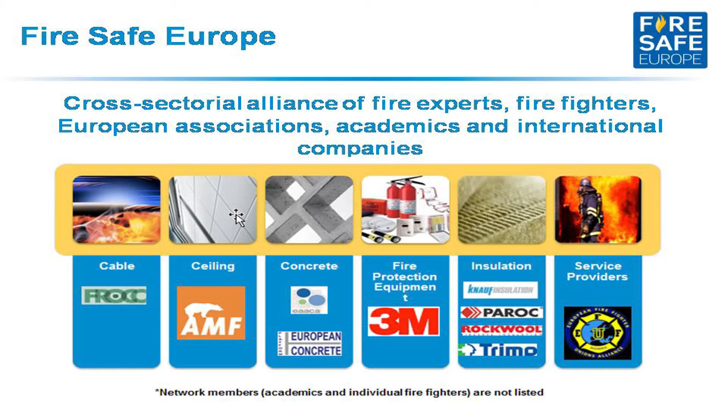The other thing I would say about Fire Safe Europe is that we are very focused, as the name suggests, on fire safety in Europe. Our objective is to explain to the European Union and the regulators in the European Union how we should tackle fire safety, but I hope that some of the lessons that we've learned in the European Union can be useful here in Dubai and more widely in the United Arab Emirates to understand how we should tackle fire safety.

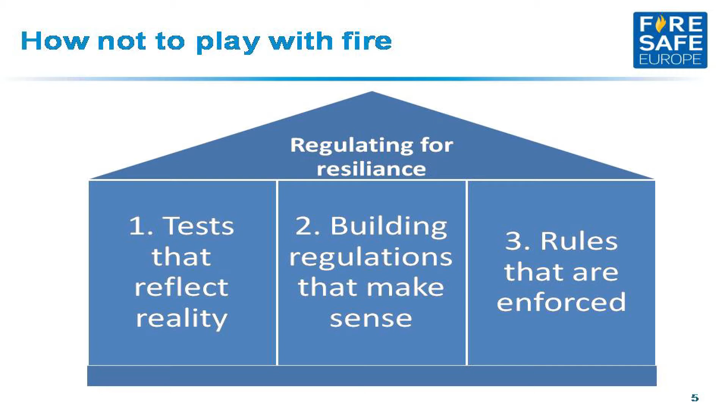Our previous speakers talked more about how we tackle building fires and how we deal with fires when we get to the fire. I'm going to talk a little bit more about the regulatory structures and the ways that we need to work to make sure that fires are not large and are safer when they get there. Some of the firefighters that we work with have been saying that in the past they came and found fires in buildings. But today they're often coming and finding buildings on fire. The whole building itself is on fire.

And as our previous speaker said, the challenge for firefighters to deal with huge fires on facades and buildings is a very different challenge than they were facing in the past. I think we have to look at some of the challenges we're now facing and ask ourselves, how do we regulate for that and how do we structure ourselves? So why are we here today?

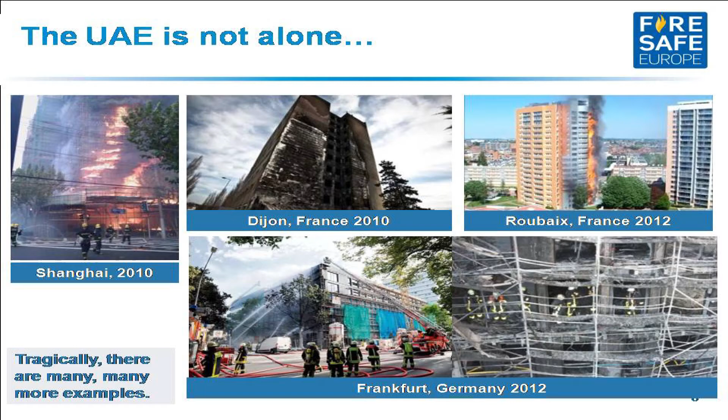Well, I think you're very aware of the fires that have happened in the UAE and some of these huge facade fires. But this isn't just a challenge here in this part of the world. It really is a global challenge. These are some of the major fires that we've seen across the world and across Europe, and some of these fires have killed over 50 people. These are really extensive fires, and they're causing major problems, not only for firefighters to fight them, but the environmental pollution that comes off them, and of course the cost, and more importantly, the cost of life.

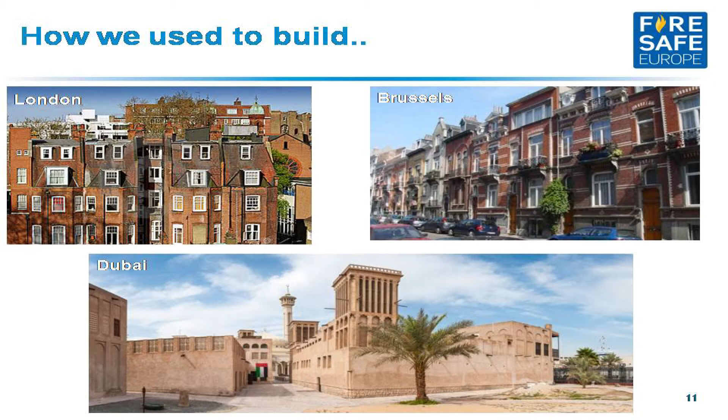So we have a common challenge across the globe, to ask ourselves, how are we going to change? Because buildings have really changed dramatically over the last 30 years. If we look at how we built buildings before, and our first speaker looked at how the UK and traditional building stock looks, two key issues I see when I look at these pictures are, one, those buildings were quite small. So we weren't dealing with huge high-rise buildings in the past.

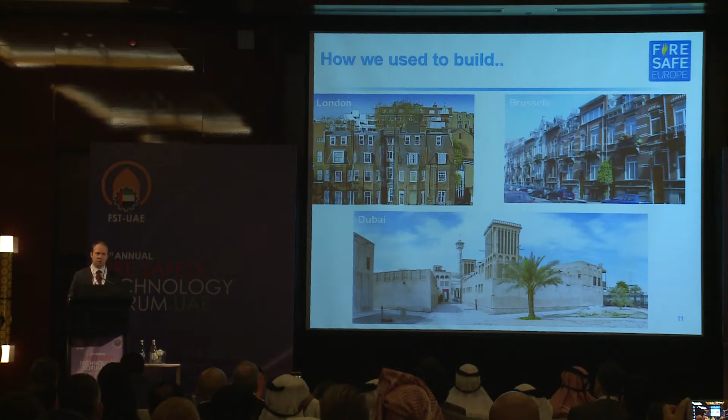And the other thing was they didn't have a lot of combustibles on them. They were often made from brick or concrete or stone. Therefore, when fires did occur, the building itself wasn't necessarily supporting those fires to grow and become more difficult. But that's not what we're seeing today. Not only here in Dubai and other parts of the Emirates, but across the world, we're seeing more and more high-rise buildings, more and more difficulty in managing them, and we're having to think quite clearly about how we manage them and what we do to make that possible.

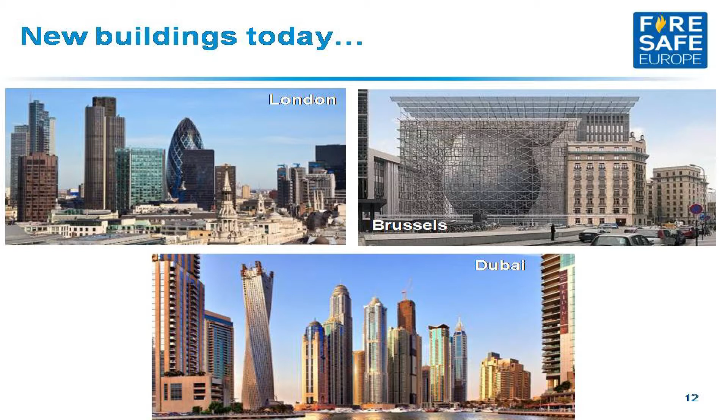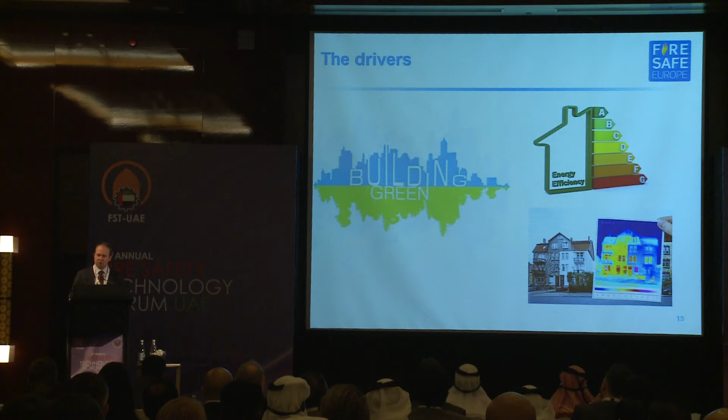And we have new drivers in the built environment. We have a huge drive for improving the energy efficiency of buildings, and for really good reasons. We know that we've recently agreed in Paris the new version of the Kyoto Protocol on climate change, and there's a lot of pressure now to reduce the amount of energy used in buildings.

And the impact of that, particularly in Europe, has been a lot of new retrofitting of buildings, adding layers of insulation on the outside, making those buildings more energy efficient. Now, as a company that produces insulation, of course, we're very supportive of that. But when we do that, we have to make sure that we don't change the way that building deals with fire, because we don't want to make it worse.

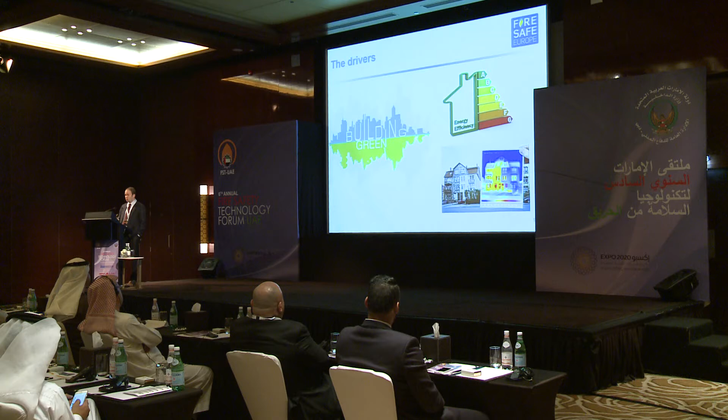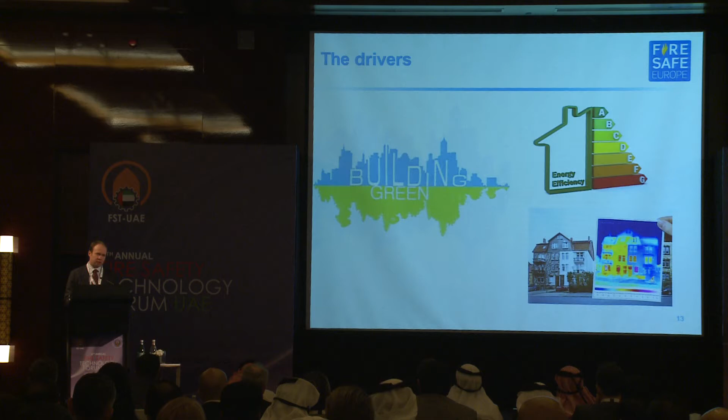Again, we're seeing more and more fires, and maybe some of the questions we have to ask ourselves is how do we ensure those buildings are now retrofitted and built correctly to manage those changes? And of course, particularly in this region, this region's been really taking the lead and taking a very strong position on sustainability. And I hope you'll be also taking a very strong position and leading on fire safety as well.

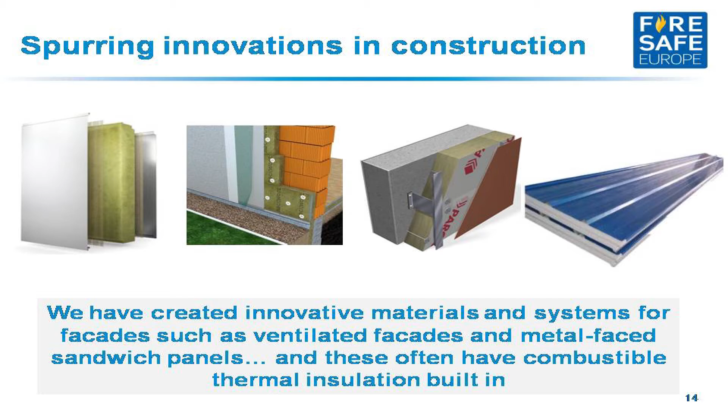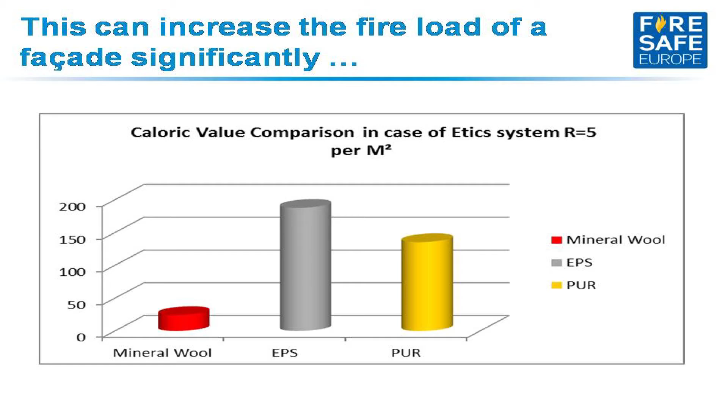All this has been really spurring innovation. So we're seeing completely new systems, we're seeing completely new approaches to the built environment, whether it's metal-clad facading, whether it's sandwich panels on buildings. We see a huge change in the way that we're building our structures, the way that the external wall systems are done, and we're having to think about how we adapt to that. And some of the things that we're seeing is that we have to take into account that those different systems can have very different approaches to fire.

This is just a quick view of the amount of calorific value in different insulation materials that we see on the facade. And I think one of the things that we notice is that the more that that facade has significant amounts of calorific value, the more likely that the fire and the insulation in that system will actually make it more likely that the fire will spread aggressively through the building.

And of course, innovation is great. But one of the problems that we face with innovation, and not just in the fire space, but always in innovation, is that innovation tends to go very quickly. But those of us who are focused on regulation and the regulatory structures, we're always playing catch up. We're always finding ourselves slightly behind the innovations because, as I say, innovations go very quickly.

Regulations, whether it's here, whether it's in Europe, whether it's in Australia, whether it's in North America, always have to catch up. And that's just something we have to take into account and accept the fact that we're going to have to constantly be thinking in this space as we adapt and we change our building systems and we go to new innovations. How do we have to adapt our fire regulations to make sure that when firefighters and others turn up at buildings, those fires are as safe as possible?

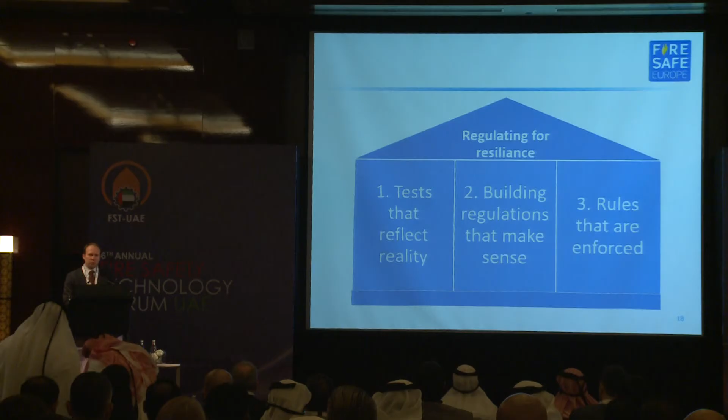So when we look at fire safety in buildings at Fire Safe Europe, we look at the three pillars which we believe are critical in terms of making sure the regulatory environment and the structures are in place. One is we need to make sure that tests reflect reality. One of the things we've seen in the past is often the testing systems for high-rise buildings, but also for insulation and external facades, have not always reflected the reality.

We have to make sure that the building regulations make sense. How we regulate a single-family home of 2 stories has to be, by nature, very different from how we regulate a 25-story building that has multiple occupants and multiple different ways of being used. So we have to look at that.

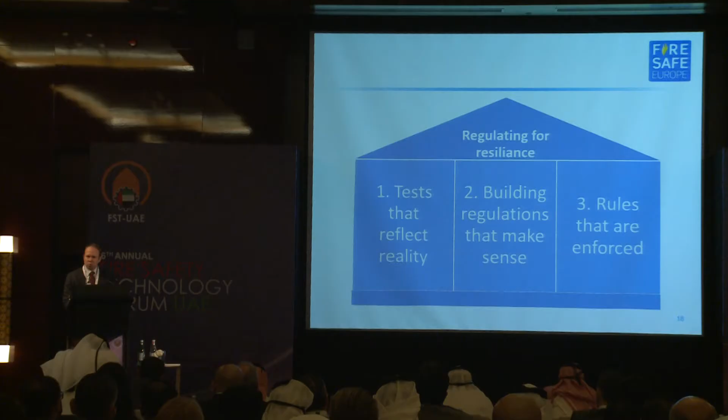And of course, the question of enforcement. The construction industry faces an enforcement issue all the time. We know enforcement is difficult, but it's very, very important in this particular space that if we're going to have systems that pass, and we're going to have regulations that fit, we should make those regulations as simple and easy as possible so that enforcement is also as easy as possible. So looking at the tests that reflect reality.

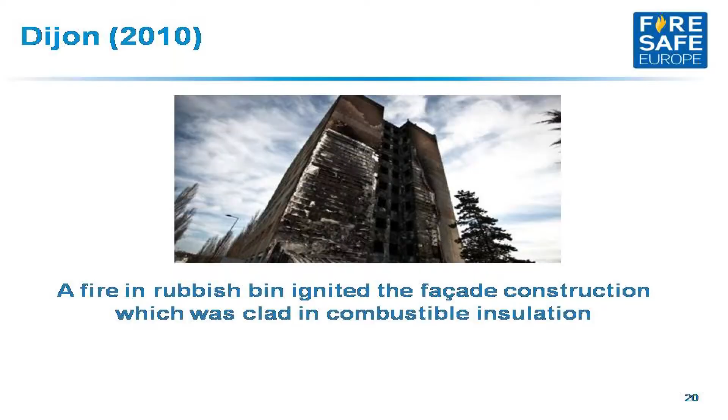In Dijon, France, we had a fire which was started by a rubbish bin which caused a major facade fire. This is quite important because many of the fire regulations and the standard testing methods for fires in Europe were based on fires coming out of the flats, fires that were coming through windows and out onto the facade. But a lot of the big fires that we've seen, particularly in Europe recently, were fires on the outside of the building, which had caused the entire facade insulation system to catch fire and go.

And the Dijon case led to the French system being changed. So now, for example, the French have learned from that lesson, and they've now developed a new system where the fire from the outside is also part of the testing regime. And large-scale testing is very important because we say we need to make sure that the tests reflect reality.

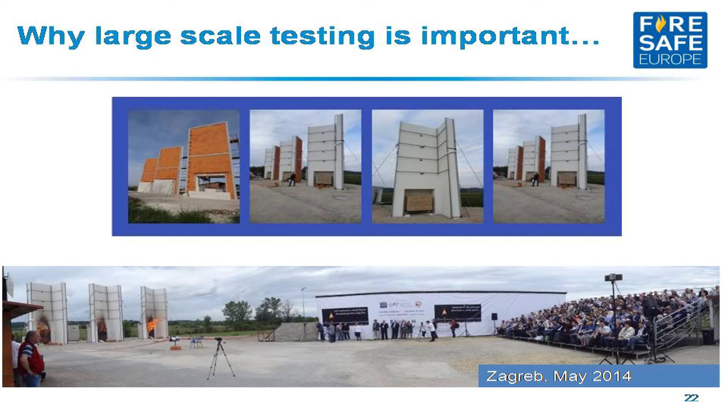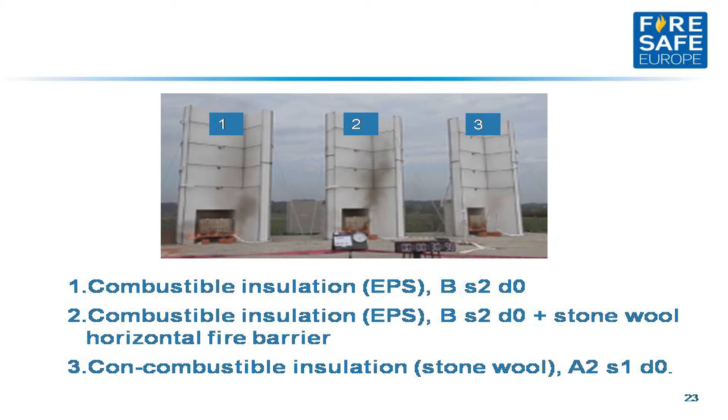So to explain to regulators across Europe the difference between how a different test can be viewed, we did this test very recently in Croatia, where we showed the difference between 3 different systems. System 1, which you can see on your left, is a combustible system. So the entire facade is made from a combustible insulation system. The middle one has fire barriers made of an A1, so a fire-safe material, non-combustible material at different stages. And the one to the right was made just from a non-combustible insulation structure.

And here you can see how the fire spread on those different systems. This is a fire load which we think is typical of the kind of fires that you get from rubbish bins or from a car going on fire near a facade. And you can see that the combustible insulation structure went up very, very quickly. I was actually at this fire test, and within 2 or 3 minutes, quite similar to the two speakers before us, explaining that these fires do go very quickly. They don't take 20, 30 minutes to get going, they take 3 or 4 minutes to get going.

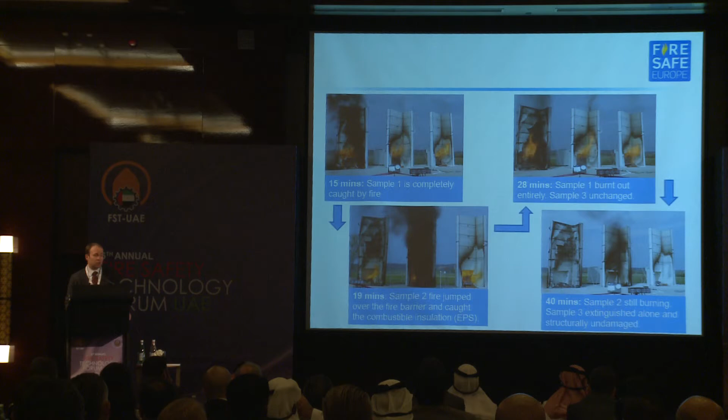And we saw that here, and you can see that within 15 minutes, almost the entire facade of the combustible material was up and in flames. On the second one with fire barriers, we saw that within 19 minutes, it actually had jumped the fire barrier, and the whole of the insulation wall was on fire. Whereas we can see even at the end of 40 minutes, the non-combustible insulation facade hadn't helped the fire continue, and there was actually almost no system damage to the entire wall. And incredibly, even after that very intense fire, you've seen almost no spread of the fire at all across the facade.

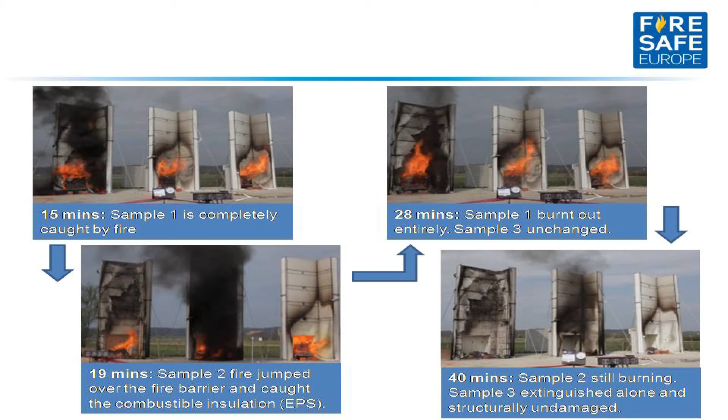And I think this points to a key issue in fire safety: if we want to deliver very, very high levels of fire safety, one of the key things that we're learning is that not using combustible materials on those facades is one of the key ways of not having a problem with that facade fire. And then we have to build in regulations that make sense.

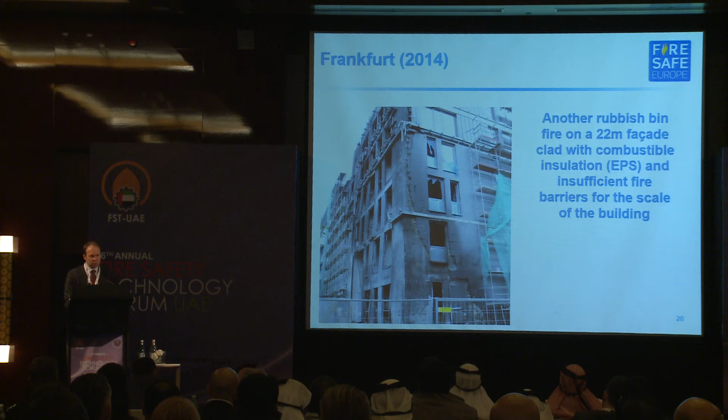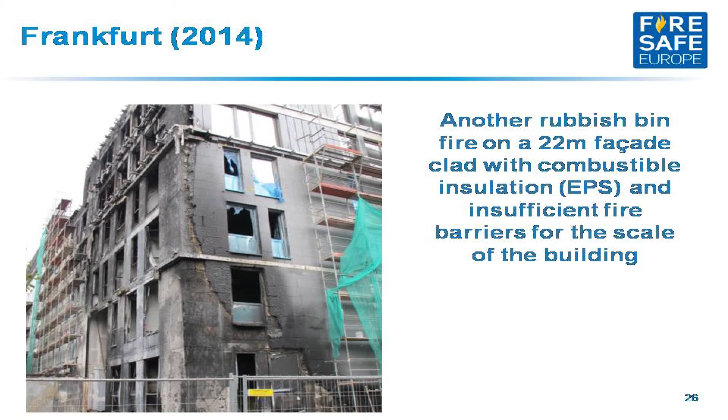So again, in Frankfurt, we had another incident, and this was on a smaller building, on a 22-meter facade, where again we had fire barriers in place, but those fire barriers still didn't protect the wall from catching on fire. So again, as we move to more and more energy efficiency requirements and more thickness on the walls, what we're seeing is that huge amount of additional combustible energy is sometimes causing fire to jump over those fire barriers. And so we're having to rethink fire barriers.

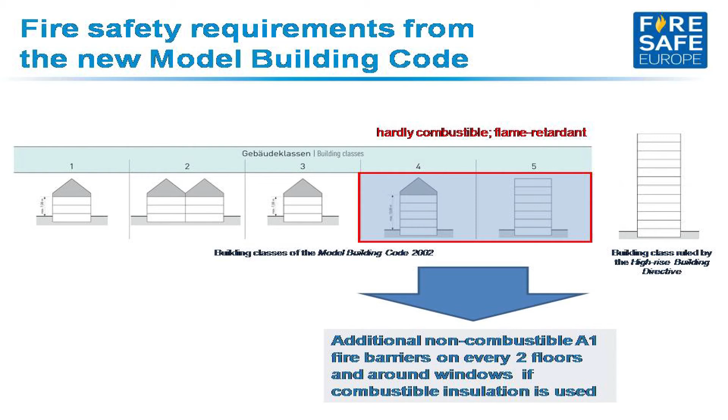And then if we look above 22 meters, Germany is now going to a situation where only non-combustible products can be used above 22 meters. And the reason for that is to really say, how do we make sure the highest level of fire safety is delivered for those buildings? The Czech Republic is now following suit, so is Slovakia, so are a number of other countries across Europe, because, as I said, we've experienced in the last few years a number of fires.

And unfortunately, one of the things I've learned over the last few years is that fire safety is driven by fires. It seems to take large fires before we actually really start taking this more seriously in Europe and across the world. And I think the only thing that we can do is make sure that when we do have large fires, we do take it seriously. And I know that's something you've been talking about here, about how you can change your regulations to make that possible.

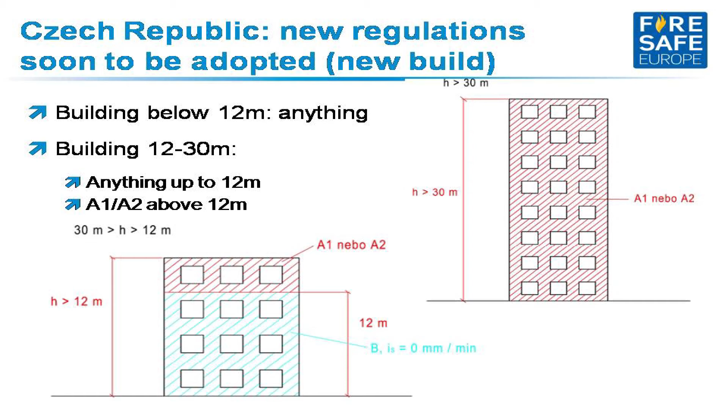And again, what we're seeing is the higher the buildings go, the more we are focusing on ensuring that those facades are as safe as possible and don't contribute to the spread of fire in the built environment. And these are the new regulations in the Czech Republic, where above certain heights, above 12 meters, we have to go to non-combustible facades. And when we're going to very high-rise buildings, the entire facade has to be non-combustible materials.

And then, of course, there's a question of enforcement. And as I said, enforcement is a very, very difficult issue in the construction industry. I would like to be able to come and tell you the 5-point plan to ensure that enforcement happens every time. I don't know what it is. I think that the last speaker from Australia had a very good point, which is that it's good to have people in the system who are not financially focused, who have to have the last word.

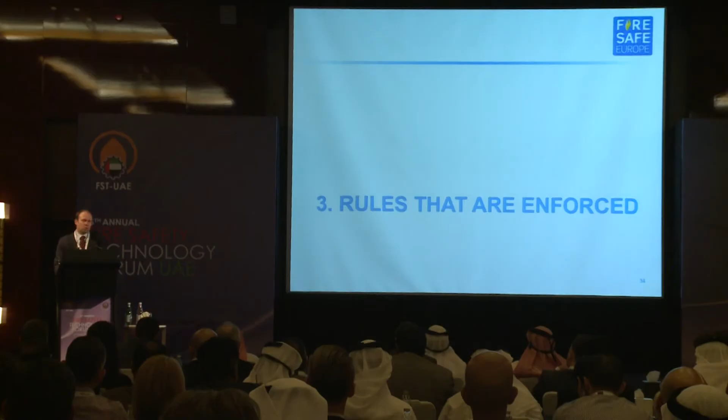I think what I've seen around the world in different countries, I know that Italy has that system. I know, for example, in the UK, I'm looking for my UK colleague here, but I think the UK also has a strong involvement of the fire service. I think what we see from the firefighters who are part of Fire Safe Europe is it is very important that you have that third-party person who makes sure that those buildings are done properly, and that if we are going to have systems where we ensure that we have test methods that work, we need to make sure that the buildings are built based on those test methods.

But again, I think what we are seeing from the different places in the world we go is that one of the key issues is how do you make sure that in high-rise buildings you're not putting combustibles on that wall. I think it's hard to regulate, for example, for not having lots of people putting things on balconies. I think people will put things on balconies, but what we can do is we can make sure that those wall constructions are not supporting fire spread.

We can make sure that roof constructions aren't supporting fire spread. And we can do that by using materials that we know don't do that. And I think that makes it easier for everyone to make sure that enforcement happens and that we end up in a situation where our buildings are as fire safe as possible.

In Shanghai, for example, we know that that fire was caused by illegal welding that was going on. Again, very hard to stop. Enforcement's always very hard. And again, that's why we come back time and time again to this point, which is that not only is it hard, for example, to make sure a building, when it's built, is fire safe, but it's hard to know how that building will be treated and maintained over its lifetime and what activities will happen.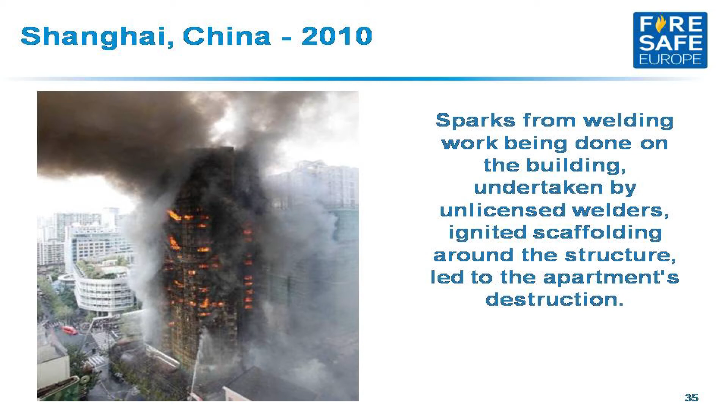And again, we come back to the fact, therefore, the more that you can do to make that system passively safe, that you can use products which don't contribute to the amount of fire propagation, the better. And again, it's why at Fire Safe Europe we've now been calling across the European Union to say that 12 meters should be the level above which you should only have non-combustible materials in the facade insulation systems.

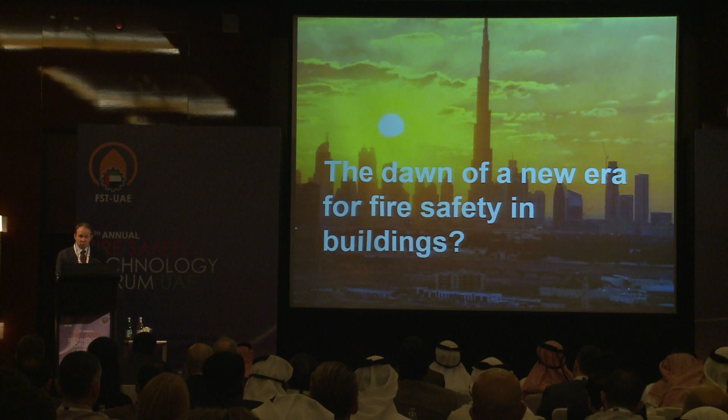So I hope this is a dawn of a new era for fire safety in buildings. Looking across your skyline, I think the United Arab Emirates, and Dubai in particular, has been a leader in developing new buildings, and particularly, as I said before, on environmental criteria, you've shown huge amounts of leadership in pushing this forward. And I hope that you'll also be able to show leadership in this space, because we struggle in Europe sometimes as well. We've made a lot of progress in some countries, but it would be great to see progress here on the regulatory structures. We can also take that experience back to Europe and show how all of us are working together.

Because, as I say, we are facing a very new challenge in terms of the built environment. In Europe, we're putting a huge amount of new cladding and insulation on the outside of buildings that didn't exist, and we're going to have to manage that trend. In other parts of the world, we're seeing a lot of high-rise buildings going up, which now need to be managed. And I hope that together we can face this challenge and create the right regulatory structures so that when people turn up at fires, they're not buildings on fire, but they really are fires in buildings, and we can get back to fighting them how we used to.